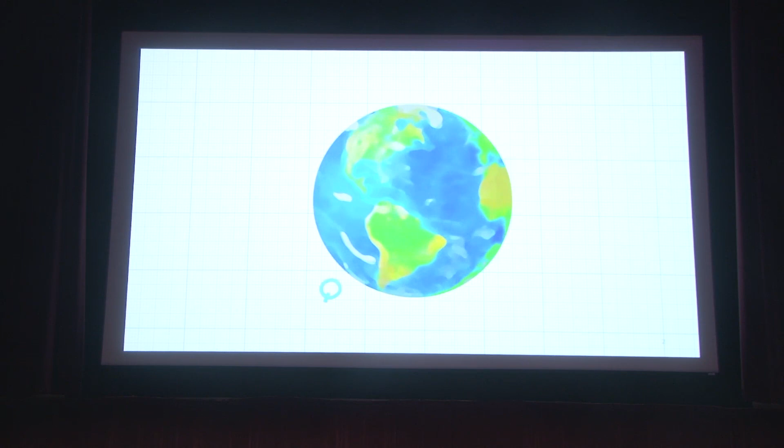A century ago, the world really needed improvements in quality of life, health, mobility, and living standards. At that time, life was a constant struggle. The 20th was a century often punctuated with the terror of war and darkened with societal struggles to overcome injustice. But the 20th was also the first century in which technology enabled the tenets and the images of those traumas to reach across the world and touch people in ways that were previously unimagined. Engineering helped create a world in which no injustice could be hidden.

Many will look back to see how we have changed and what we have accomplished. The future's a bit foggy, but it's not unreasonable to suggest that the 21st century will enjoy a rate of progress not unlike the 20th. It's something to hope for.

Now, it is my great pleasure to introduce our keynote speaker, my colleague and good friend, another great aeronautical engineer, Dr. Pat Anderson. Dr. Anderson works in the area of new technologies, including vehicle concepts, alternative aircraft propulsion, advanced flight controls, learn to fly, and novel certification strategies. He was the advisor for the world's first piston gas electric hybrid aircraft, the Eco Eagle, designed by students in this university and flown in NASA Green Flight Challenge.

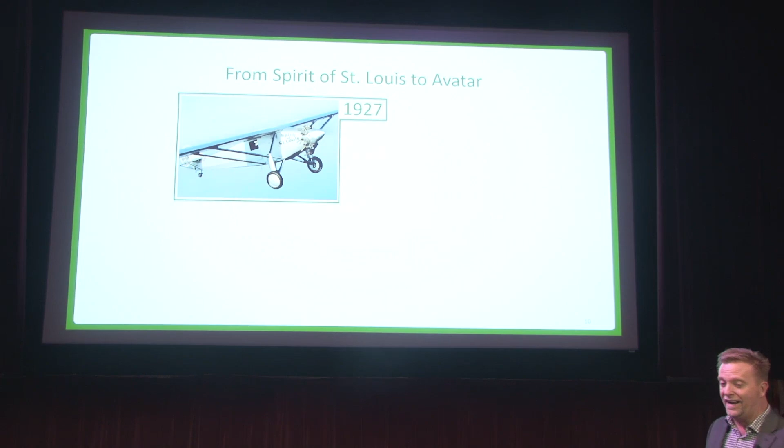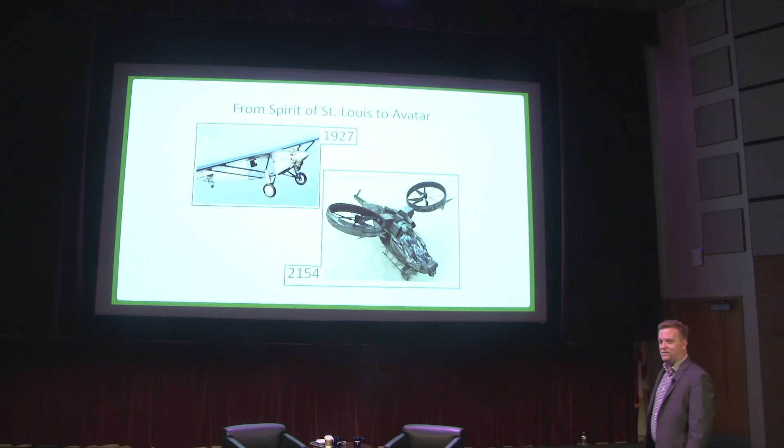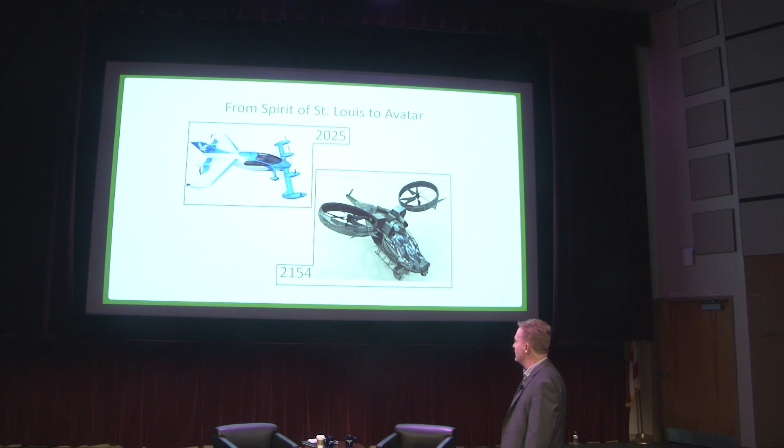So airplanes for about the past 115 years have looked the same. And now we're about to see a rapid change in that. So you could say Avatar there, 2154. I don't think we're going to have to wait till 2154. I think in the next 5 to 10 years, we're going to see vehicles that look like this, that transform what airplanes look like into the next age of airplanes in urban air mobility. And that's going to require us to think a little bit different. So I have Think Different Part 1.

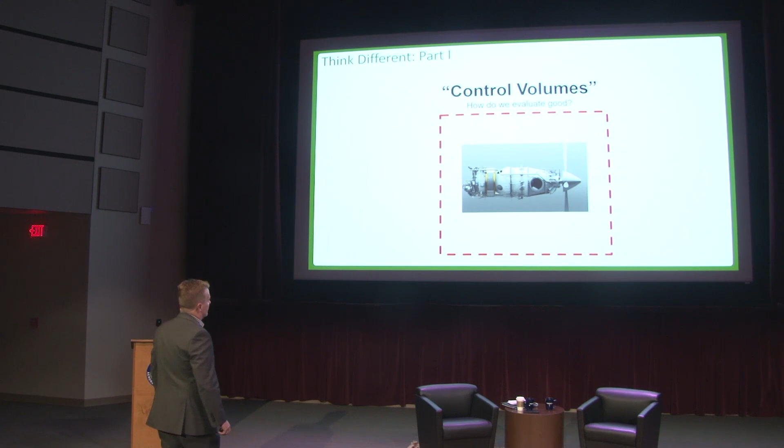We started down this path of how is this going to happen? How is this going to unfold? And the first thing that we saw was electric airplane propulsion. And so as we looked at that, we looked at the classical aircraft engine. And when we go to school here in aerospace engineering, lots of times what we do is we say, let's put the control volume around this, and let's look at that engine. Let's try and make the fuel flow of that engine less. But we might have missed the point. Maybe we have to expand that control volume out. Maybe we have to look at the whole airplane.

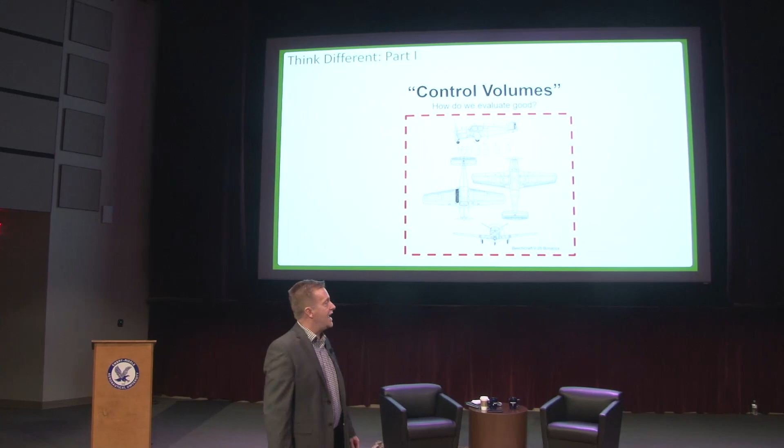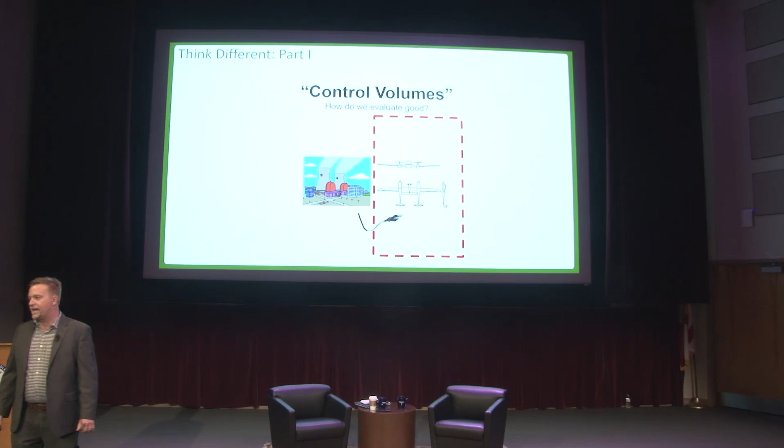Well, when we get to aircraft design, we look at that too. Maybe we have to fold more than just the airplane in there. Maybe we have to fold in where the energy came from, where the emissions occurred. And so maybe when we put gas in this airplane, we have to consider the petroleum plant where it came from. We might have to consider the vehicle that brought it here. Now we have electric airplanes. The airplane we competed against in NASA's Green Flight Challenge was a Pipistrel fully electric airplane.

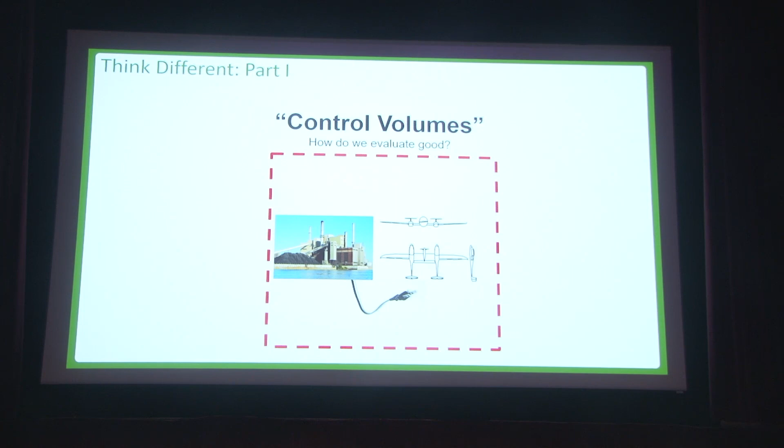And I have a Bart Simpson nuclear power plant there. But actually in Santa Rosa, California, the energy for that airplane did actually come from geothermal. So the actual greenhouse gas and other emissions were nearly zero in that. And so this has made us think a little bit. What if it happens to come from coal? So in fact, we've met up with the Argonne National Lab trying to learn what is the wells to wings sort of transformation of energy as we use it, and how can we use that in our design process.

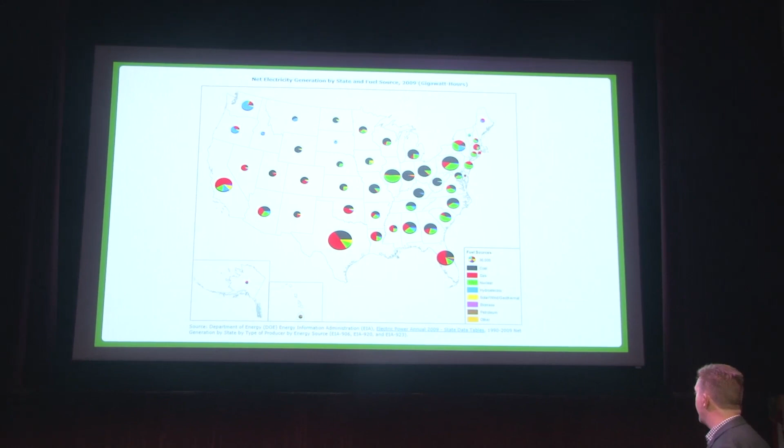If you look at West Virginia up here, that black circle indicates that that is coal. So the interesting thing that they say is a Prius that's being driven in West Virginia may make more emissions than a Suburban driven on gas because it's coming from coal.

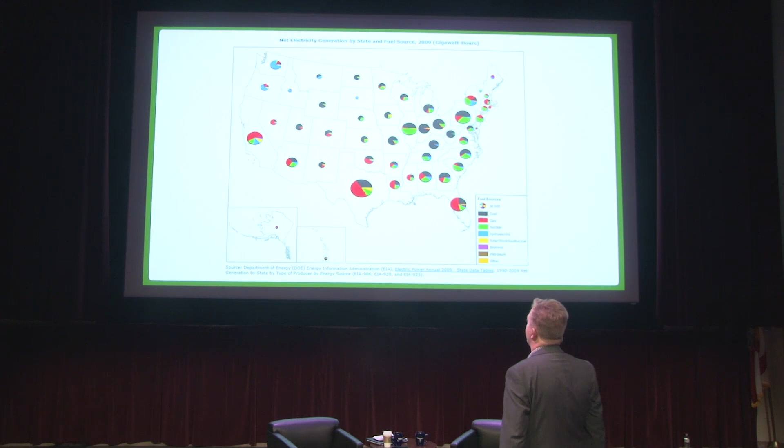If you look down here in Florida, we're in the middle, we're using natural gas. If you look up here in Washington State, that blue indicates mostly hydroelectric production of power, and that has almost no emissions. So we're now starting to fold this into our idea of aircraft design and thought about using electric and hybrid propulsion as we moved on.

And so how do we evaluate good? Maybe we have to expand that out all the way to looking at the entire world as our control volume. And of course, this is round peg, square hole, typical, so let's do this. But propulsion enables aircraft design. So we're now in the third generation of aircraft design.

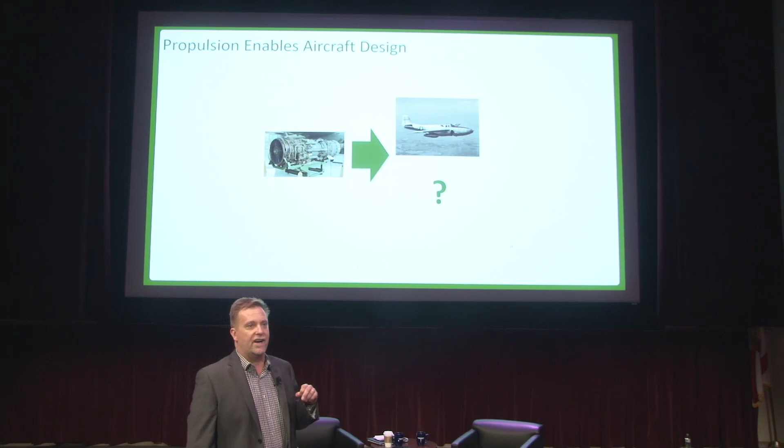We first had piston-driven airplanes, and this is kind of a funny airplane. This looks a whole lot like a piston-driven airplane. That's an XP-59, the first jet-engined airplane of the US. And it looks so much like a piston airplane because we didn't know what to do with a jet engine. We took a propeller out, and we put a jet engine in.

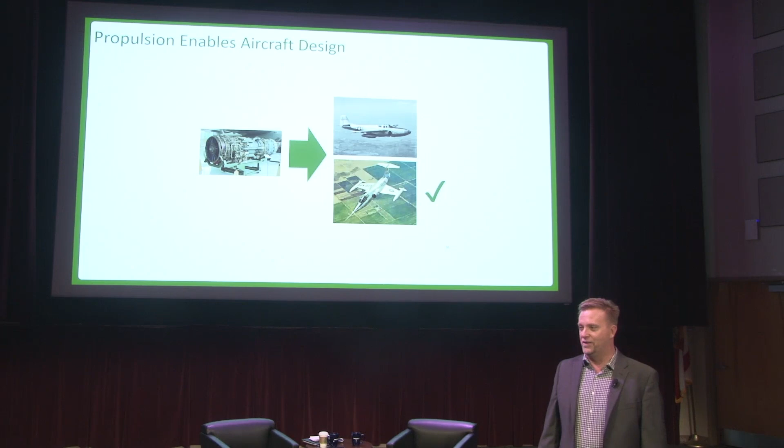And in fact, when it was out at Muroc Airfield, they stuck a plywood propeller on it so the Nazis couldn't figure out that we actually had invented a jet engine airplane. And this was very believable back then because it actually did look like a piston-driven airplane. But that's not really what took advantage of the jet engine. It was 15 to 20 years later where we came up with the Century series airplanes, and we said, that's what you do with a jet engine, not the first one.

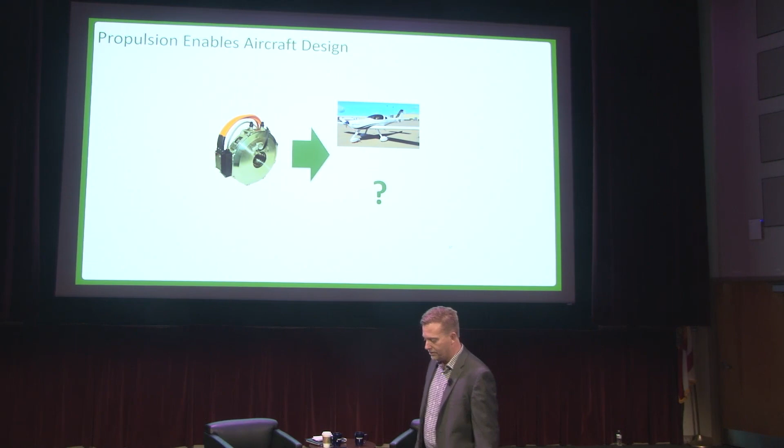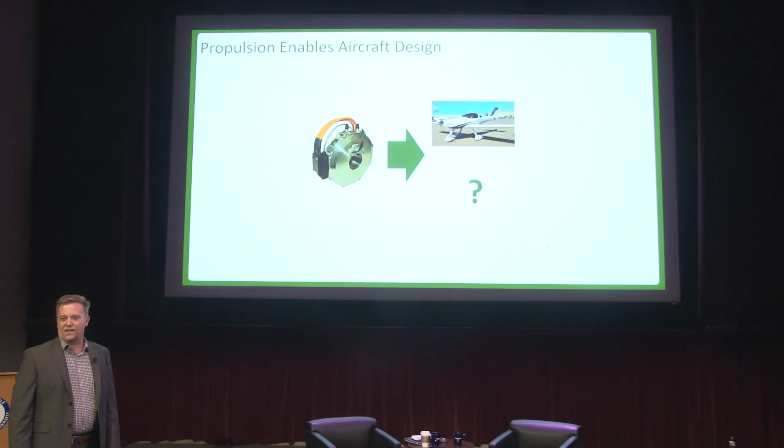And so now we're at this point where we're thinking, here's an electric motor. So this is one that we have over in the Eagle Flight Research Center. That's a 100 horsepower electric motor. It weighs 67 pounds. And we thought, well, we pull the recip engine out of our airplane and we stuff that in and we have an electric airplane. And guess what? We missed it again. That's not the thing that electric propulsion enables. What's the thing that electric propulsion enables?

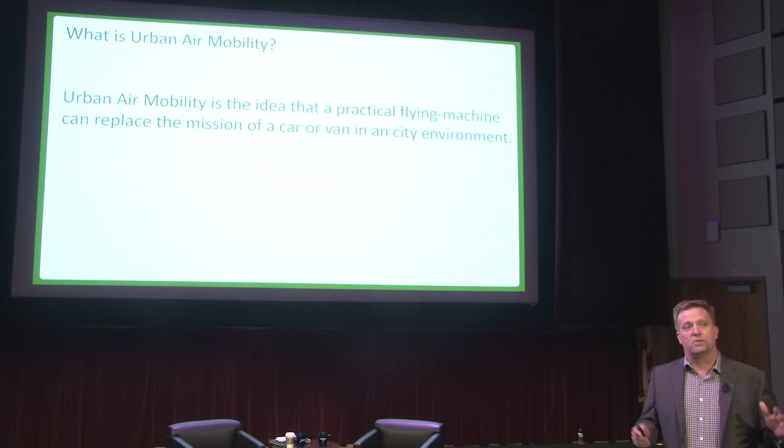So what is urban air mobility? Urban air mobility is the idea that you can have a practical flying machine that can replace the mission of a car or a van in a city environment. And this is really radically different from airplanes that we normally see because almost everything we're doing in normal aircraft design class is either to minimize emissions, fuel flow, or maximize range and endurance. And this is the opposite of that. It has to only go a little way.

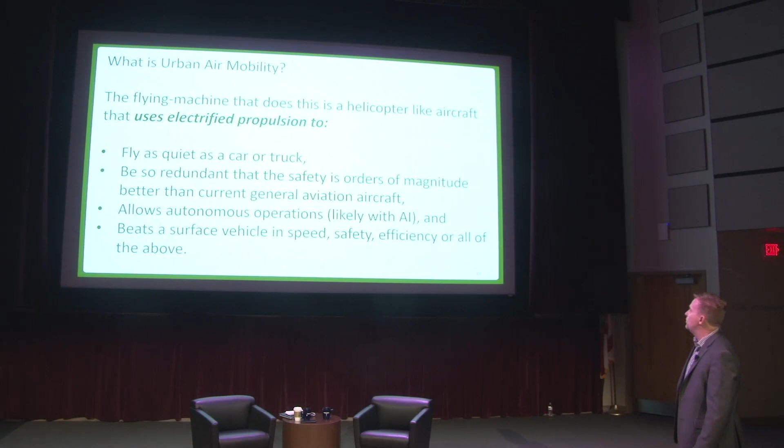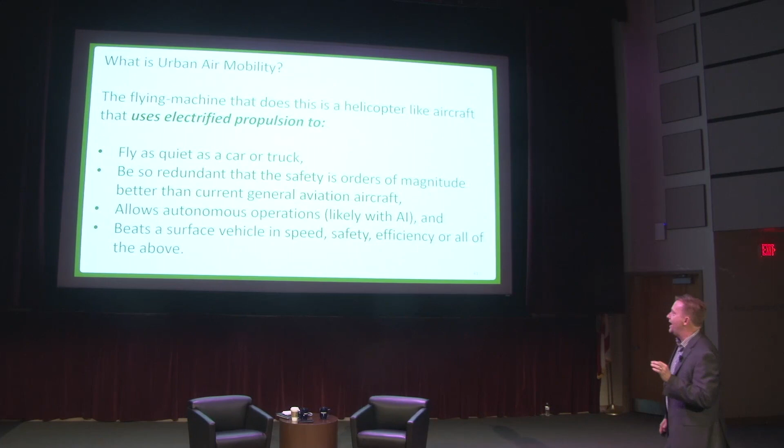And so this flying machine, what does it look like? Well, it's a helicopter-like aircraft that uses electrified propulsion. And that's really important. The electrified propulsion is what enables this, and it enables it to fly as quiet as a car or truck, be so redundant that it can fly over cities. So this is orders of magnitude safer than a helicopter, allows autonomy like AI and other types of autonomous operation, and beats a surface vehicle in speed, safety, efficiency, or all of the above.

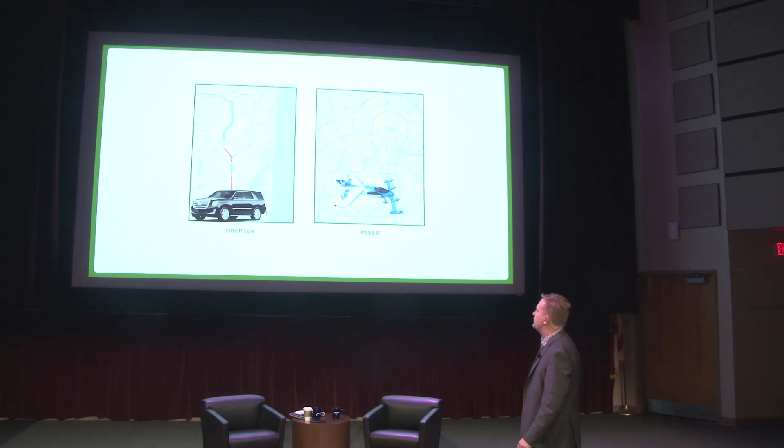And so what are we trying to do with this? We're trying to replace that Uber on the left going 30 miles down in South Florida that might be going 16 miles per hour average speed during that course with a vehicle that looks somewhat like a helicopter that has almost no variability in the speed that it takes to get there. So that's the mission there.

This is literally taking surface urban mobility like Lyft or Uber and replacing that car with a vehicle that can do the same mission within a city. So we're selling tickets. The vehicle is going to fly 20 hours a day. That amortizes the cost of the vehicle. What it is not is a long-range vehicle, and it may not even be more efficient than a helicopter or an airplane, but we'll talk about that in a second. I'd like to show you Uber's idea of what this is.

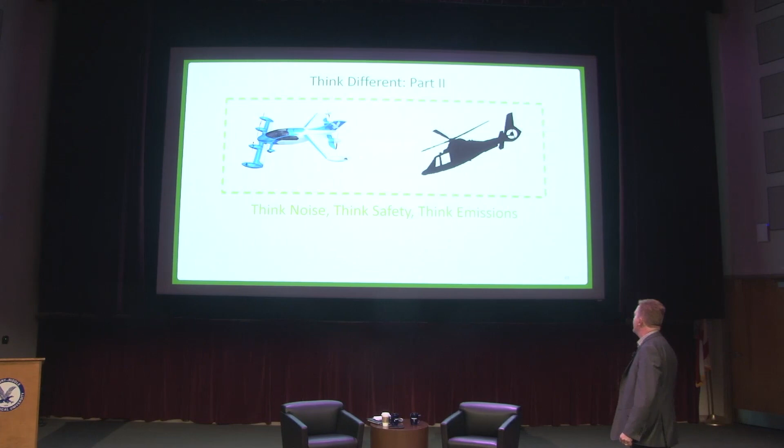And so when we go to school in aerospace engineering, we don't compare our vehicle to a car. And so we have to expand that control volume out even further, because we may not be competing against a helicopter when I look at designing this. I may be competing against that. And I might not have the ability to fly a helicopter in there because it's too noisy. So having a quiet vehicle is an enabling technology. Having it safer than a helicopter is an enabling technology. So we've had to think different about this.

So what is the enabling climate that is allowing this? One is the market. And so one of the things that Uber has that everybody that has a cell phone in their pocket knows is that they're tracking what we do. So they know exactly how many people go from JFK to downtown Manhattan. They know how fast you get there. They know how much you're willing to pay. They know how much you're willing to pay more if you get there faster.

And so this is a really simple business plan. If you amortize how often the vehicle flies, you can figure out how many vehicles, what the cost of the vehicle would be. And what you end up with is it doesn't cost any more than a regular Uber to do this. And so what we see is a large number of, especially Silicon Valley, wealthy people, a lot of the people that are not getting into the commercial space race are investing significant amounts of money in this, on the orders of hundreds of millions of dollars.

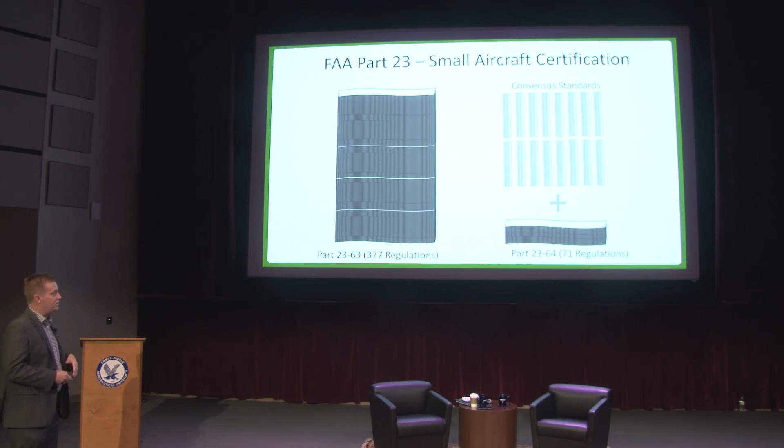And what they've done is they've changed it so that it's not prescriptive. What it says is the vehicle must be safe. It no longer says it must have 2 magnetos. It doesn't tell you how to do it. It just specifies how safe it needs to be. And then a consensus group of knowledgeable people can vote on, here's some new technology. Do you believe that works? They all put their hand up, and if they all agree, the answer is yes, and you're allowed to certify in that way. And so the regulatory environment has changed drastically. And again, I'd like to pat Embry-Riddle on the back because most of that happened here at the university.

The market, as I said, you can end up with vehicles that go 5 to 10 times faster at the same cost as premium ground transportation. If you look at an Uber in South Florida, you might want to go 30 miles. You might average 16 miles an hour, which is almost 2 hours. And the variability in that is depending on if there's accidents, traffic, or whatever. So you may go at 60 miles an hour one day and 5 miles an hour the next.

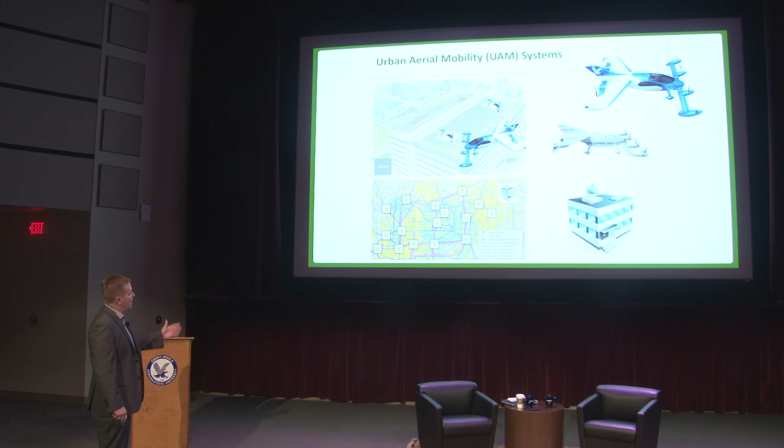Whereas a personal air vehicle is pretty assured to go about 150 miles an hour, 12 minutes, no variability in all this. So the business model, again, is there. This is a picture of Dallas. There are cities right now that are vying for heliports, so this is intracity travel, and there is some infrastructure that has to be stood up with this. So you're going to end up with helipads, places at airports where these vehicles can land.

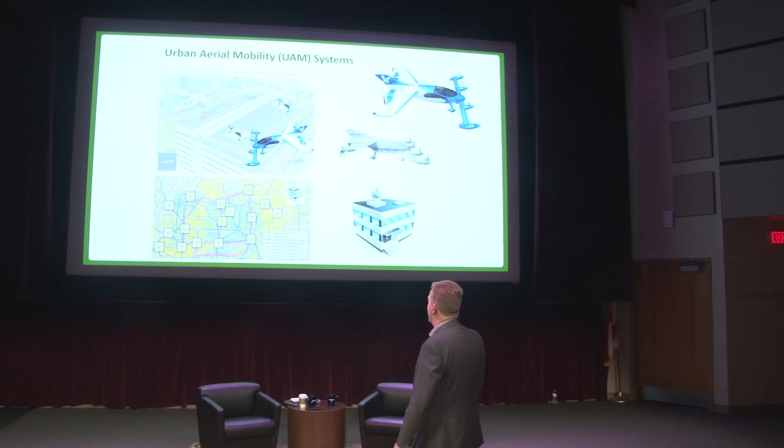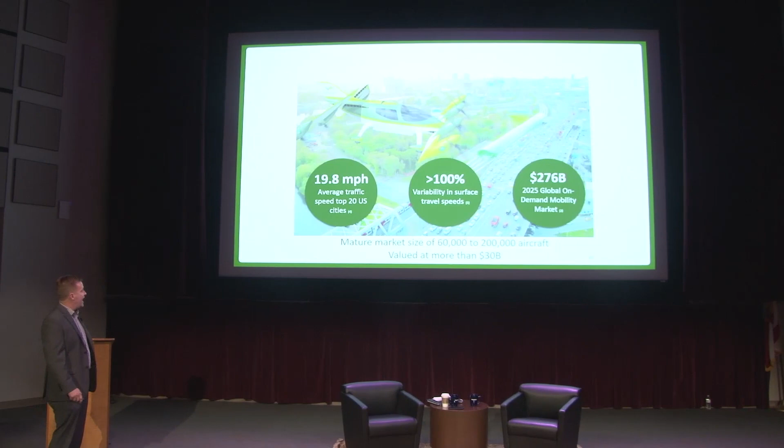Another great talk about if these are fully electric, how do you get the electricity up to the pad? We're talking about a whole bunch of electricity, or if it's a hybrid, getting the gas there, so putting the infrastructure in, and people like Argonne National Lab are starting to look into this. And so to give you an idea of what they find at the end of these spreadsheets is that right now the average speed in the city is about 20 miles an hour. It might be good one day, bad the next day, lots of variability.

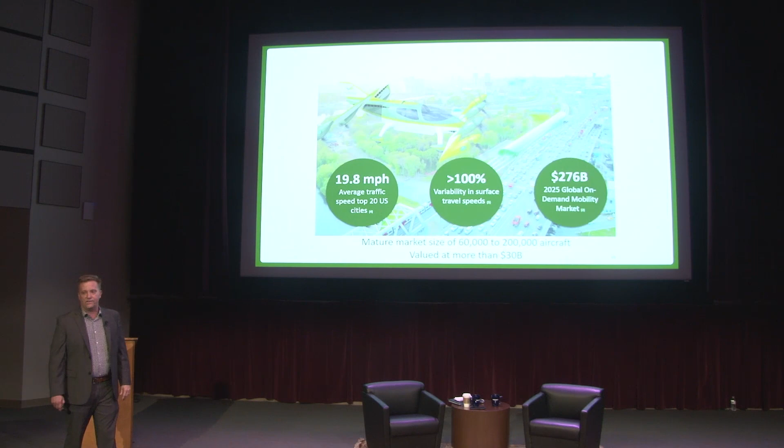Uber is pointing out, and Lyft is pointing out, that this is a $276 billion market in on-demand mobility, and they think that they can slice off 30 billion of that in aircraft, which has a mature size of 60,000 to 200,000 aircraft, which, by the way, would double the number of aircraft on the planet if you're counting.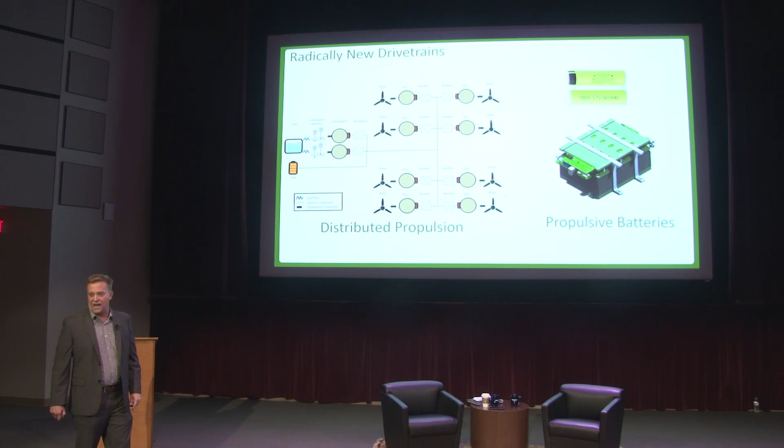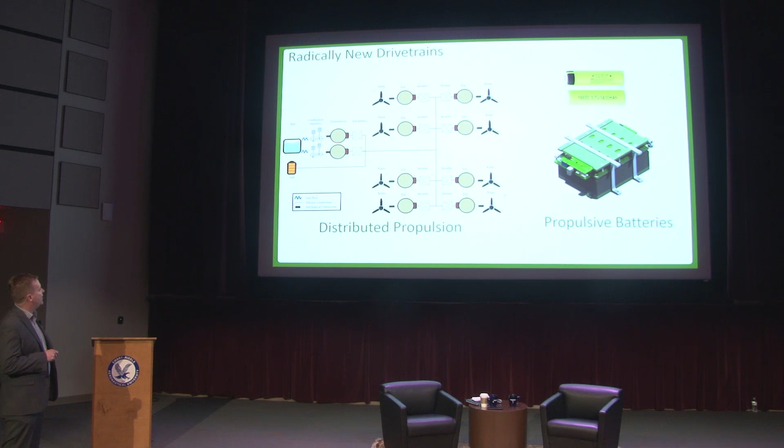What technologies enable this? Well, distributed propulsion is one. Who said safety? Somebody said safety out there. So here I have 8 different propulsion systems, and I could probably lose 3 of these and still fly. So that's one side of it. Over here I have 3 different ways to make the electricity. Here I have 2 generators, 2 different piston engines driving a generator, and then I have a battery, and any one of these 3 can keep this vehicle flying.

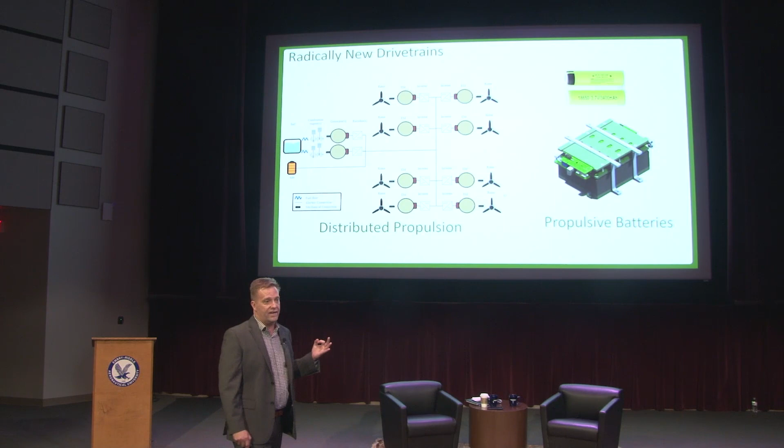So now I have 3 sources of power. And what you find out is I can hit that airline level, like 10 to the minus 9, or 1 in a billion chance that it would fail. Driving a lot of that is battery technology, propulsive batteries, which we're working on over at the Eagle Flight Research Center. There's an enormous design space with this. I'd love to see what the next design book looks like. I mean, it's going to be something this high. It won't, because it'll be on a computer at this point.

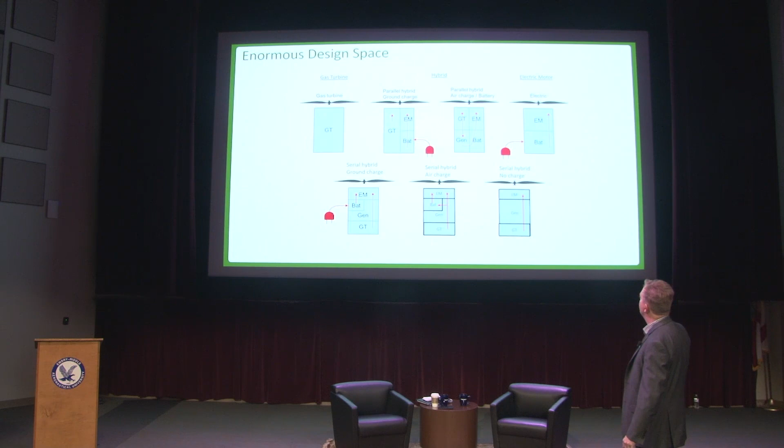But it's a gigantic design space, because we go all the way from classical gas turbines to electric motors with hybrids sitting in the middle, parallel, serial, air charge, no air charge, ground charge. The number of ways you can iterate on this is huge, and we're trying to work ourselves through that space. Here's a typical gas engine. I'm going to talk a little bit technical now just to give you some little nuggets of why this all works. Over here, if I look at a typical gas engine, the torque is tied directly to speed or RPM of the engine. So if you tell me speed, I tell you what torque it makes.

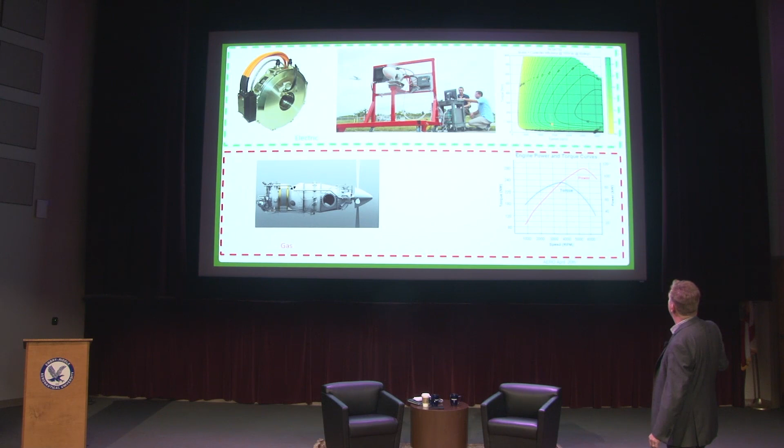In an electric engine, that's a little bit different. So up here, this is a curve for this electric motor right here. And what this says is this is the efficiency. And basically what this means is I can pick any speed and make any torque. So they're completely decoupled. And so what that means is I can generate very high torque at low RPMs. I can pick to be wherever I want on this map, and that'll come into play here in a second.

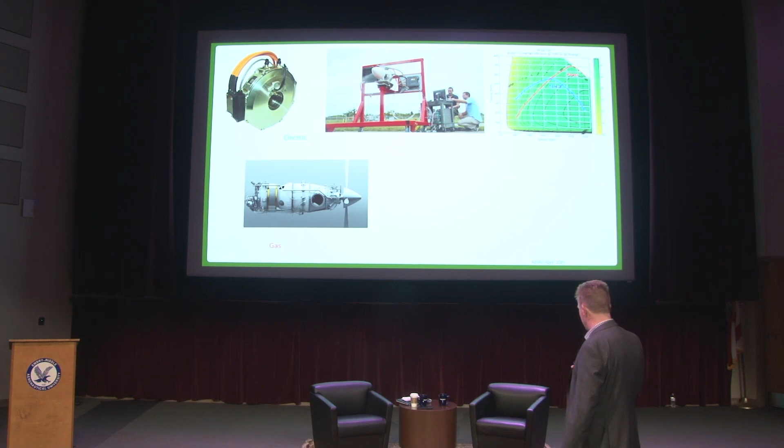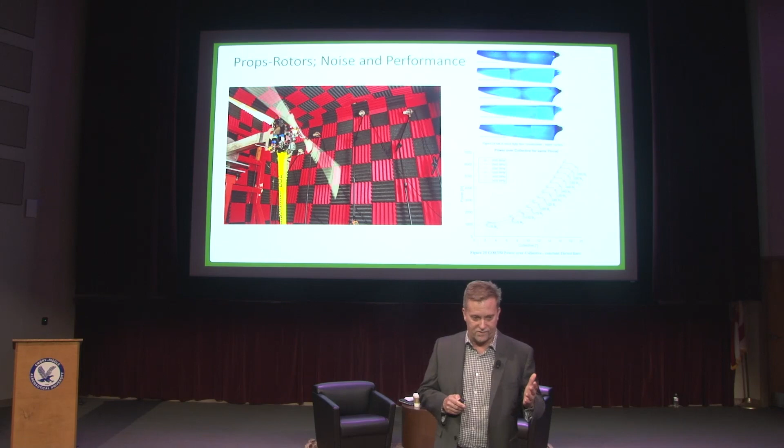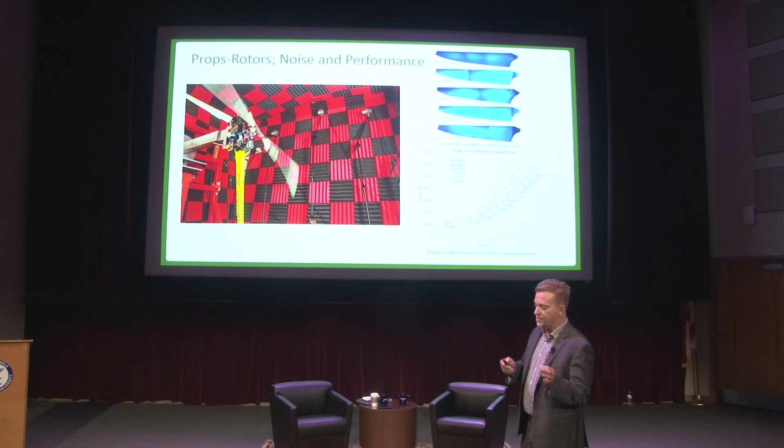What that allows us to do is turn our props and rotors very slowly. So I don't know if you know this, but the speed of a rotor or something making thrust, how fast that turns, really has a lot to do with how much noise it makes. And so the slower I can make that, the quieter the vehicle is going to be. And so we've ended up using electric motors to operate at low RPMs using the high torque that electric motors can make. In doing that, we've built new prop rotors that take this technology into account.

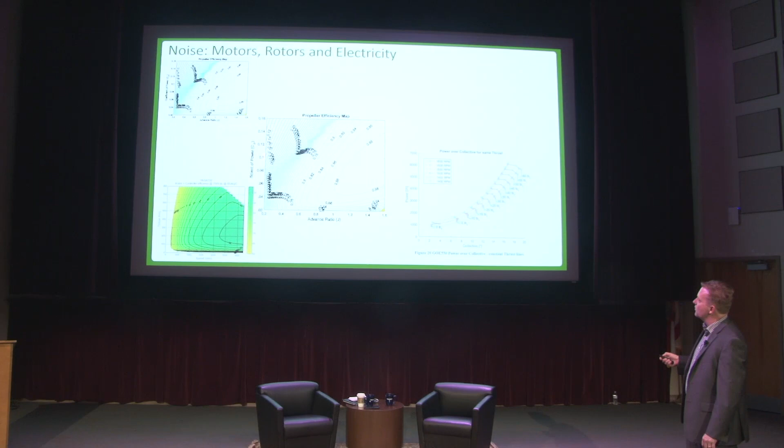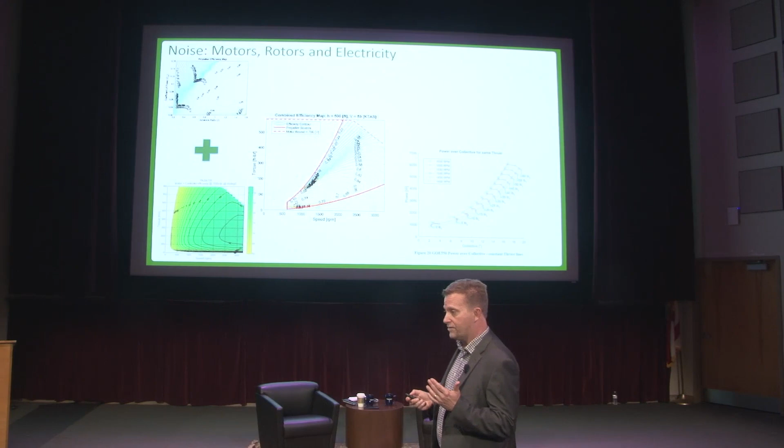And so if I combine all of these things, what I end up with is the efficiency of my electric motor. I can figure out what the rotor or propeller is going to do, map over that. Once I map over that, I can figure out the total efficiency of the propulsion system, which ends up being in the 80% for an electric airplane, as opposed to 30% for a gas-powered airplane. And then put in a line of constant thrust.

I can operate the airplane anywhere on here and grab the noise that it makes and overlay that on here. There'll be a test later on this, so I hope you're taking notes.

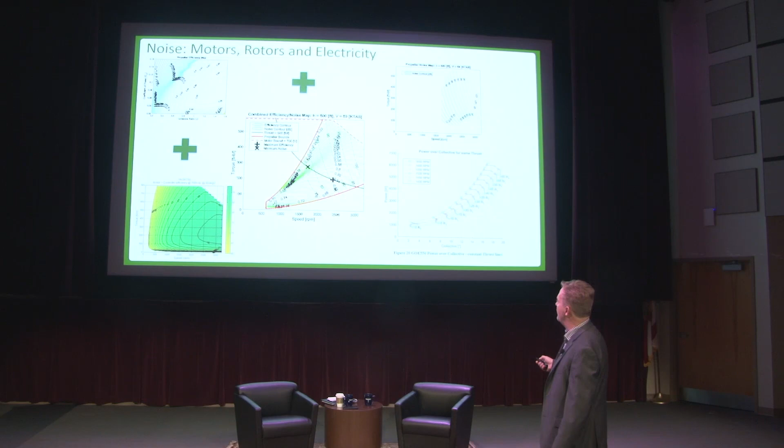And what I find out after doing all that is that there's a position of maximum efficiency, which is where we've always flown for the past 115 years. This is where we fly. But we find with an electric motor and a specialty rotor, we can slide along this line, the passengers would never know, and we trade propulsive efficiency, 64%, for 30-some-odd% propulsive efficiency, but we peel off 15 dBA of noise, which is the invention of Blue Thunder.

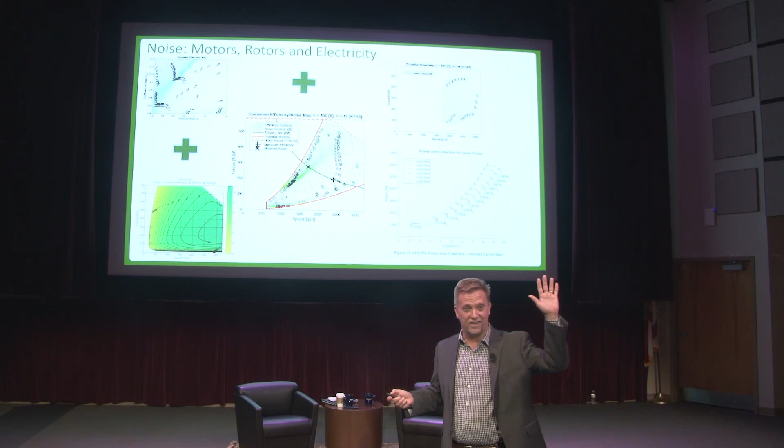How many people remember Blue Thunder? I'm getting very old, right? Roy Scheider, Blue Thunder, silent helicopter. This is the derivation of the silent helicopter. And so electric propulsion enables this.

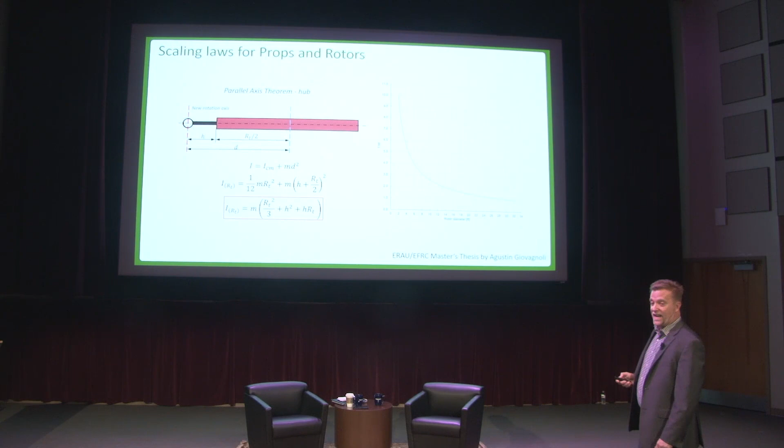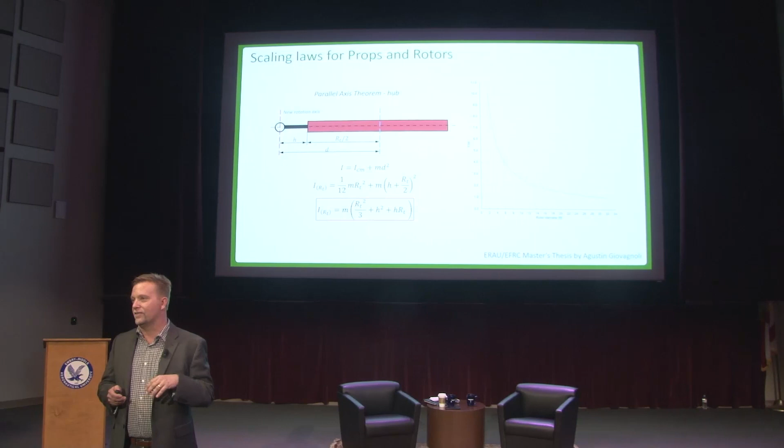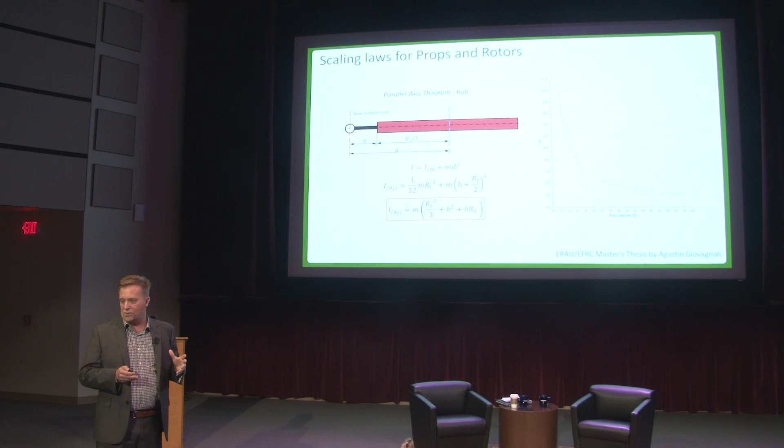There are some bumps in the road in this. There are some scaling laws. There are some physical barriers that are interesting to look at. One of them is that a lot of people use fixed pitch blades because this is really looking a lot like the drone market. So you've all seen the explosion in the drone market, multicopters. Well, the way those things control the attitude of the vehicle is by changing RPM on fixed pitch blades. Unfortunately, as those blades grow, the thrust-to-weight ratio goes down because the electric motor gets heavier faster than it makes thrust, which is kind of complicated to explain, but there's that curve.

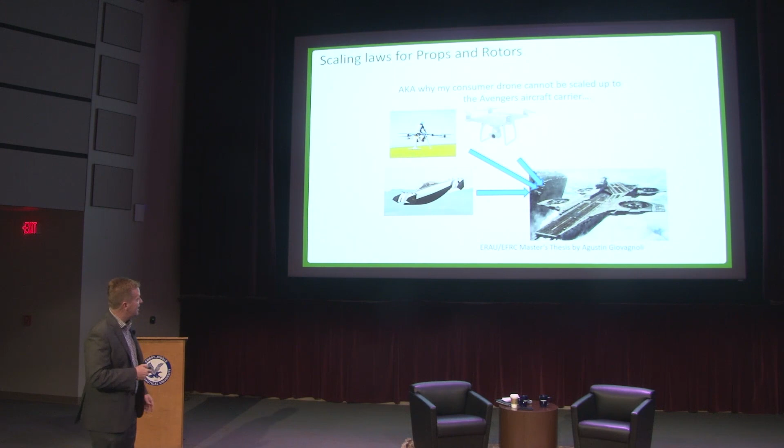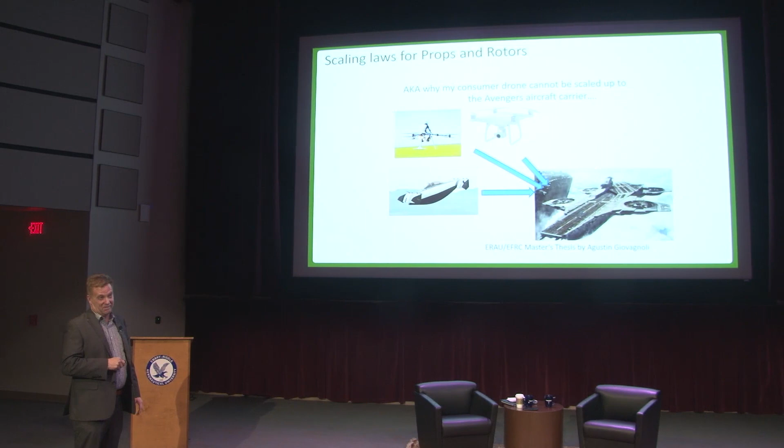And what I'm trying to say here is that, I'm sort of the gatekeeper of this. I get a lot of folks that come in and they say, well, I've got this and I'm going to scale it up to the Avengers aircraft carrier. Okay? And in fact, there are 5 that I can count that have convinced people in multi-billion-dollar deals that they can actually do that. And the answer is they can't because of this scaling law.

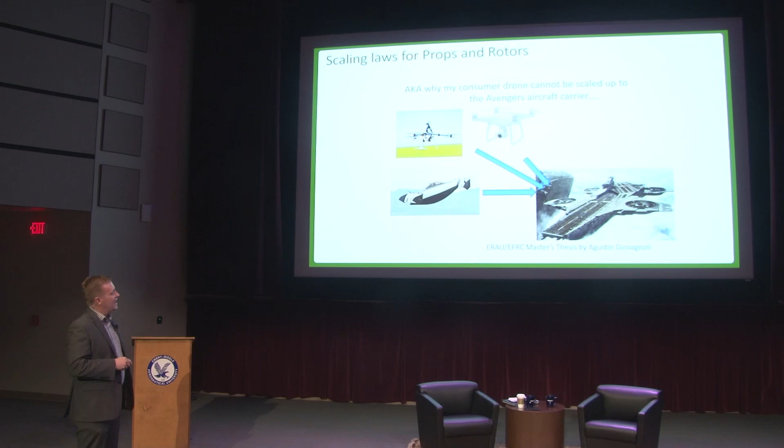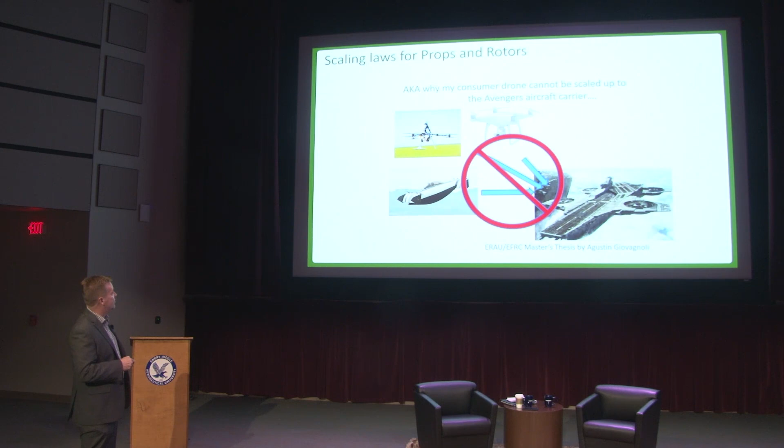Is there a way around this? So you can't do this. But the good news is if you use a rotor blade like a helicopter, this is scalable. The bad news is that the people doing this in their backyards and their garages don't have the ability to make helicopter rotors. So it gets more complicated.

The other one is hybrid versus fully electric. And I'm going to give you a little automotive analogy. Do airplanes and autos track each other? Because a lot of people think they do. We're going from gas to hybrid to electric vehicles in cars. And the end goal is sort of fully electric. So I'm going to ask the question, why do we have hybrid cars right now?

Range. I heard some others, but I'm going to stick with range, right? No, the answer is not range, and that's the 90th percentile answer that I get. And you've got a Tesla, right? So if I put another 85 kilowatt-hour battery pack in the back of that Tesla, do you still think it'd go pretty fast? Probably. So at that point, when I put a second battery in it, it would have the range of any other car.

But the reason that they don't do that is it's price. You would have a $140,000 car at that point, and guess what? They wouldn't sell enough of them to make it worth the while. So in automotive, the limitation is bucks. Everything that goes into a car has to be as inexpensive as possible.

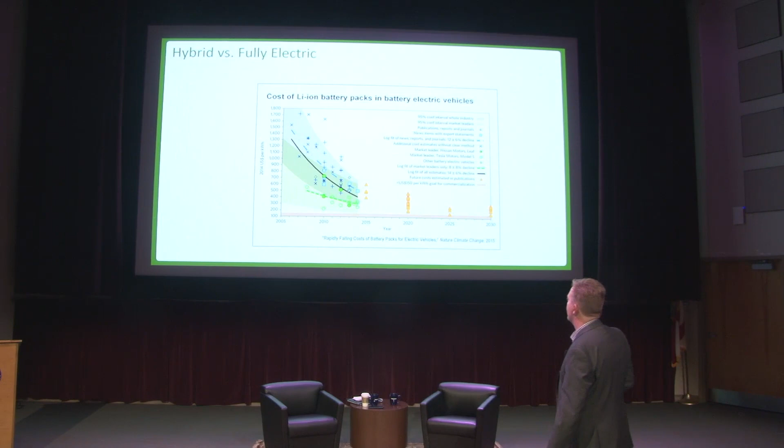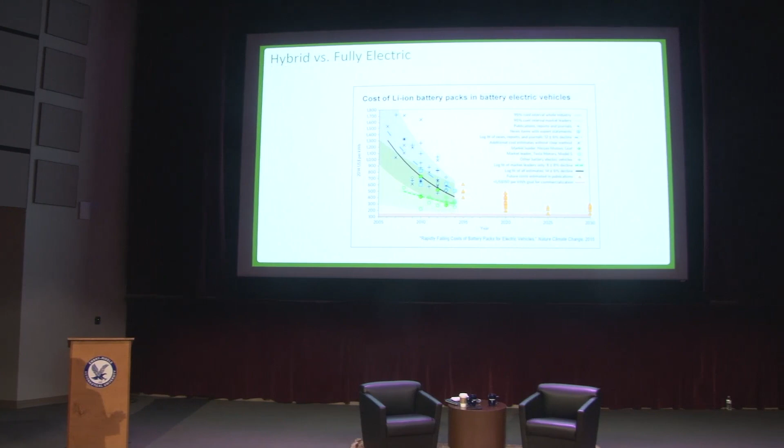And so it's really interesting because the government, the Congress, has said to Argonne National Labs and some of the other labs, we would like you to make vehicle batteries better. And by vehicle, they defined it as car and not airplane. When I went to school, I thought vehicle included airplane.

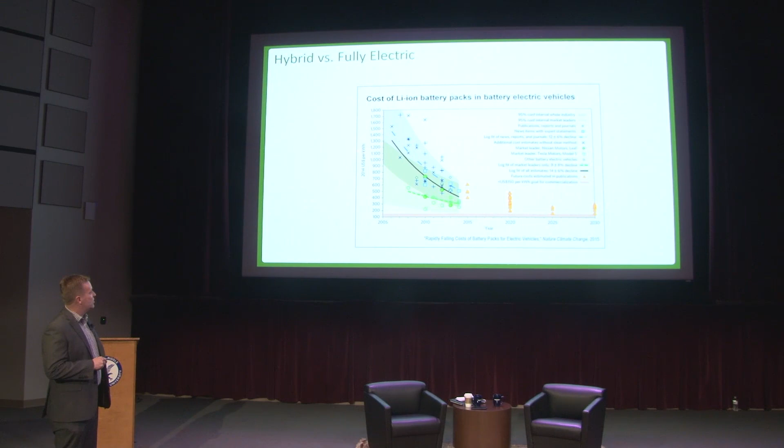So that's Congress's definition there. And better meant cheaper. And so you see them putting billions of dollars in, and this is what a capacity of batteries costs, and it is dropping like a stone. And that green area there is $150 per kilowatt hour of battery storage. And at that point, an electric powertrain is cheaper than a gas powertrain, and guess what? We all switch to electric.

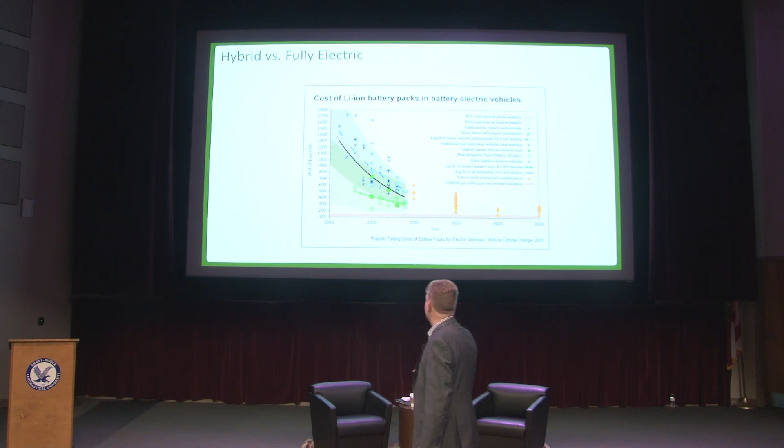And so you see, if you start projecting this out, it's kind of a long explanation, but batteries just don't cut it. Although they help this whole thing, they help with the electrified propulsion. But pure batteries aren't there yet. And even if there's a Nobel Prize winning change in chemistry, it's not going to be in an airplane tomorrow because of safety concerns. So the good news is that there's another way out of that, which is not using fully electric, but the mature version being hybrid.

So, I drew out for automotive that we started with gas, we went to hybrid, and then electric. But in fact, what is important in the automotive industry is cost is king. Weight, they don't much care about. Volume is sort of important. In the aerospace industry, it's actually weight, volume a little bit, and we could care less about cost. I wish that weren't the case because I own an airplane. But we appear not to care about cost in aerospace. And so really this switches around. It doesn't go gas, hybrid, electric. We've seen some smaller airplanes that are electric, but the mature area, at least for a long time, until batteries get about 20 times better, is hybrid.

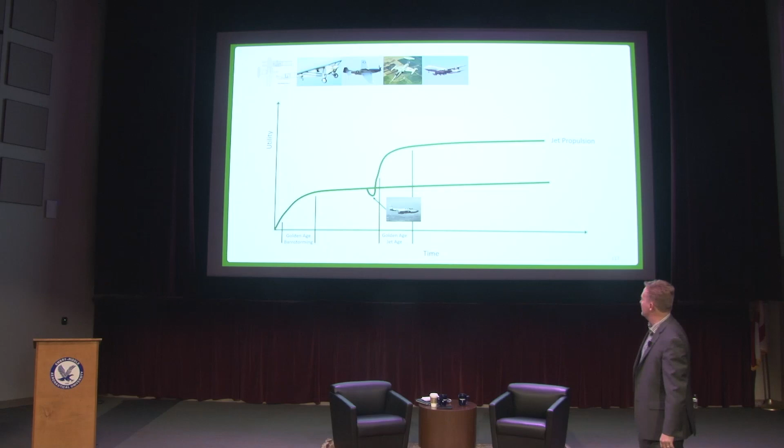So why did I say this was a golden age, the age of urban air mobility? You know, the golden age of barnstorming. This is when the Wright brothers, Lindbergh, and those folks, there was a very steep learning curve. And then recip engines kind of lean over, and we gain a couple of % every year. Then there was a golden age of jets. We screwed up a little bit in the beginning and had a little dip, but then it picked up. And again, jets are sort of leaning over. Well, guess what? We're in the third hump. Electrified propulsion is going to enable all of these things to happen.